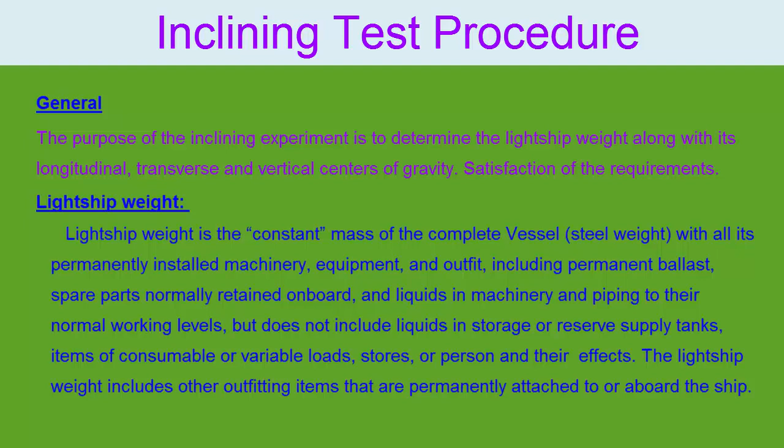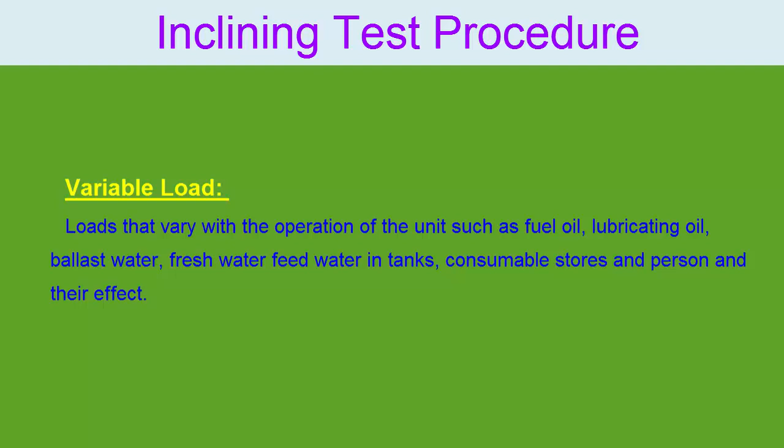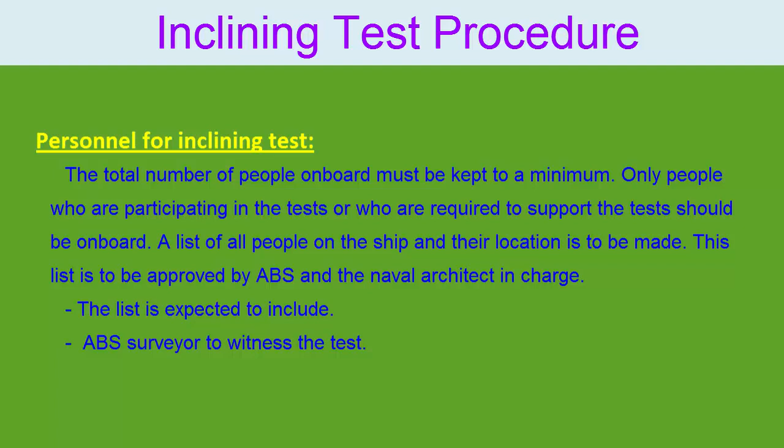Personnel for inclining test. The total number of people on board must be kept to a minimum. Only people who are participating in the tests or who are required to support the tests should be on board. A list of all people on the ship and their location is to be made. This list is to be approved by ABS and the naval architect in charge. The list is expected to include an ABS surveyor to witness the test, 2 naval architects to run the test, make measurements, monitor ballasting procedure and help conduct the deadweight survey.

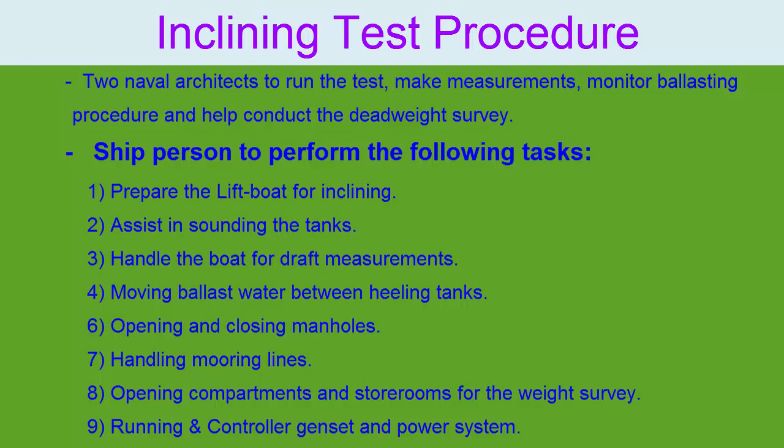Ship persons to perform the following tasks. 1. Prepare the lift boat for inclining. 2. Assist in sounding the tanks. 3. Handle the boat for draft measurements. 4. Moving ballast water between heeling tanks. 6. Opening and closing manholes. 7. Handling mooring lines. 8. Opening compartments and storerooms for the weight survey. 9. Running and controlling genset and power system. 3. People familiar with the lift boat and all its equipment to assist in the weight survey. These persons shall have the necessary keys to provide access to any locked compartments.

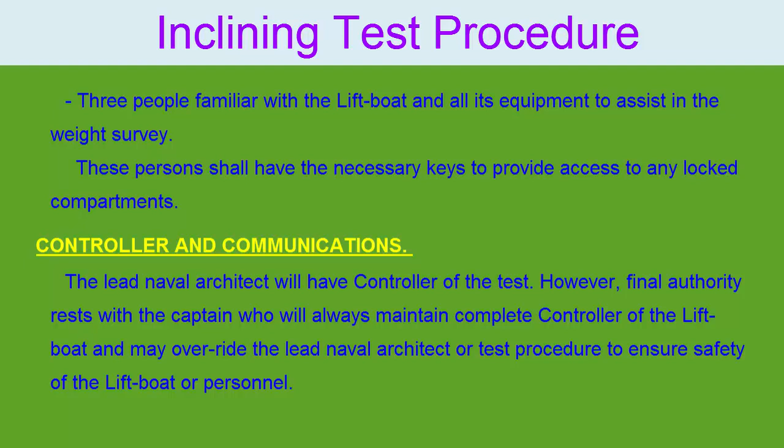Control and communications. The lead naval architect will have control of the test. However, final authority rests with the captain, who will always maintain complete control of the lift boat and may override the lead naval architect or test procedure to ensure safety of the lift boat or personnel.

Inclining control shall be set up in the pilot house conference room. The table will be provided to record data and make calculations. There shall be an efficient two-way communication system between the inclining control and the standby boat, the crane operators if necessary, each pendulum station, each draft reading boat.

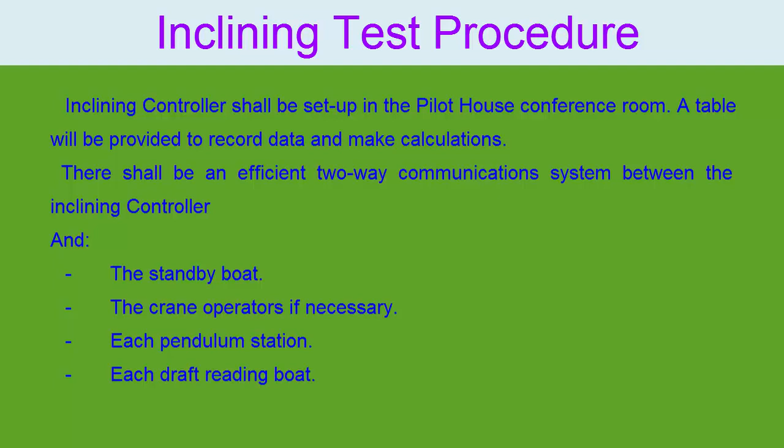Preparation for deadweight survey. Documentation and notifications. The ABS surveyors will be given notice of the date and location of the tests as early as possible. The following information will be submitted to ABS. Incline procedure. A list of items to go on/off board to achieve lightship condition from the inclining condition is to be prepared. Vessel identification. Date, time and location of test.

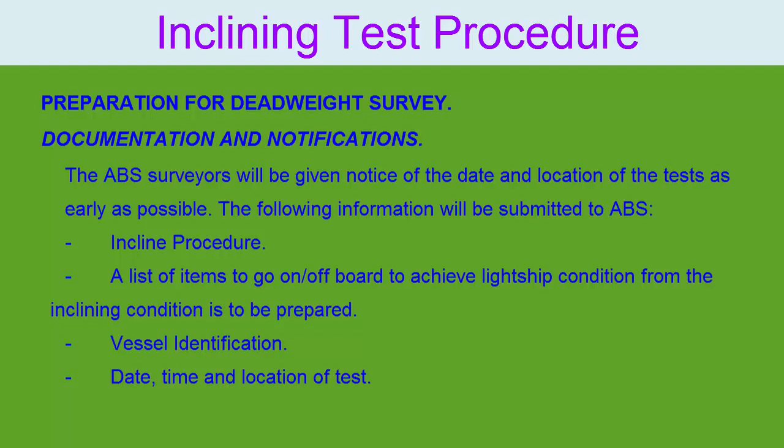Inclining weight data including type, number, certification, method of handling and expected heel angle. Estimate of the lift boat displacement and stability at the time of inclining. Condition of tanks, specifying those which will contain liquids but will not be pressed up. Draft and approximate KG. Trim/heel of lift boat.

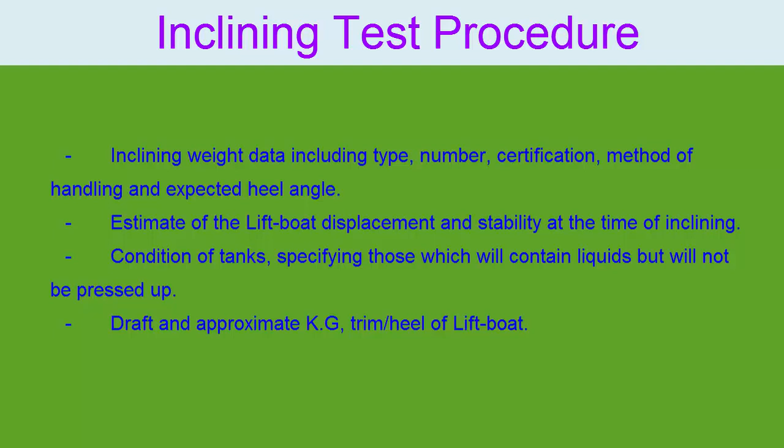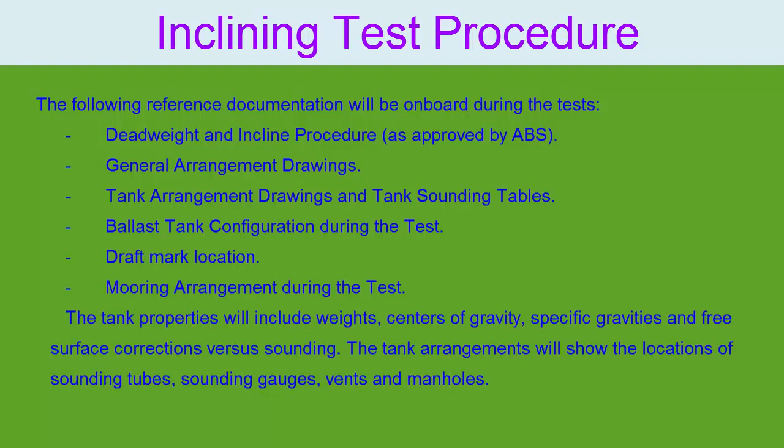The following reference documentation will be on board during the tests. Deadweight and incline procedure as approved by ABS. General arrangement drawings, tank arrangement drawings and tank sounding tables. Ballast tank configuration during the test. Draft mark location. Mooring arrangement during the test. The tank properties will include weights, centers of gravity, specific gravities and free surface corrections versus sounding. The tank arrangements will show the locations of sounding tubes, sounding gauges, vents and manholes.

Achieved test condition. Test of sounding system. All the sounding systems should be tested before the inclining experiment. All Z-drive units are to be locked to avoid movement during inclining. Cleanup. Proper cleanup is essential. The weight estimate of each item is subject to some error which can accumulate to a significant value. Often, people estimate high, so this introduces a weight penalty on a lift boat. Proper cleanup is essential to minimize this penalty.

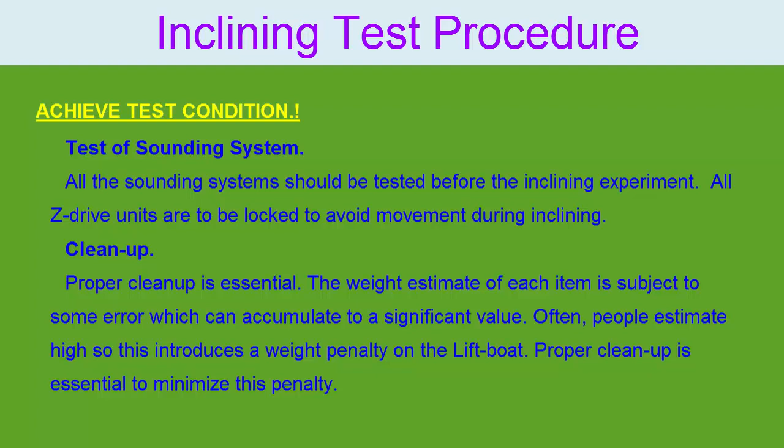The manholes of all hull void tanks shall be opened and their residual contents shall be stripped out by portable pumps. Interior manhole covers for tanks to be void or slack shall be left off until completion of the inclining. The tanks will be inspected by the ABS surveyor and by the naval architect in charge. As much deck load as possible must be offloaded before the start of the test. This includes portable equipment, etc. All shipyard material should be removed from the lift boat. This includes all welding equipment, scaffolding, temporary stores or scrap metal.

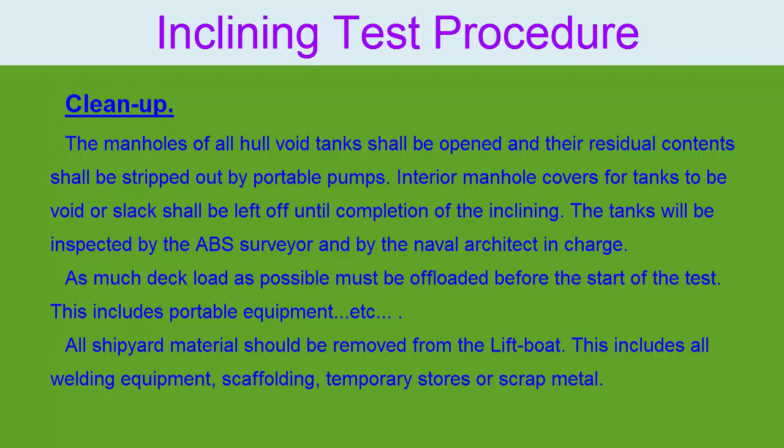Lift boat personnel should prepare a detailed list of remaining weights with VCG, LCG and TCG to be deducted, added or relocated from the as-inclined unit to arrive at the light ship condition. The number and weight of items to be added, removed or relocated shall be kept to a minimum.

The naval architect will be aboard the vessel at least 2 days prior to the inclining. A list of all weights on board will be compiled and updated at the last minute before starting the test. This list will be subject to review and acceptance by the attending ABS surveyor.

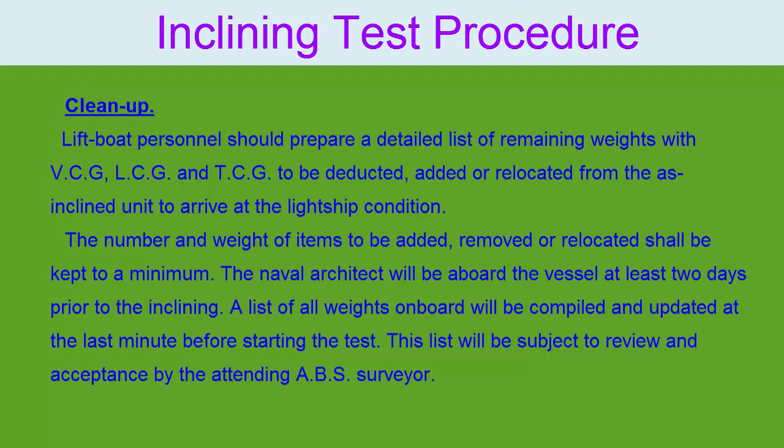All items which may swing or move shall be secured. All movable systems should be in their stored position. Crane booms shall be in their rests. All equipment, fresh water makers, shall have liquids at normal operation levels.

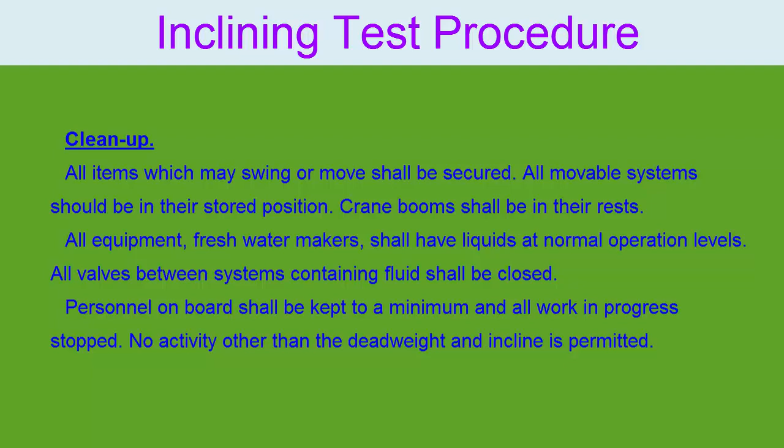All valves between systems containing fluid shall be closed. Personnel on board shall be kept to a minimum and all work in progress stopped. No activity other than the deadweight and incline is permitted.

Tank preparation: interior manholes to all voids and to all tanks to be slack or empty shall be opened for inspection by the witnessing surveyor and shall be left open until the test is complete. The spaces must be gas-freed and safe for entry.

Liquid levels in tanks, for which there is no choice but to leave them slack, will be adjusted so that the free surface is relatively steady during the test. Fill levels corresponding to abrupt changes in tank dimensions shall be avoided. Communications between tanks should never be permitted and any cross connections should be closed.

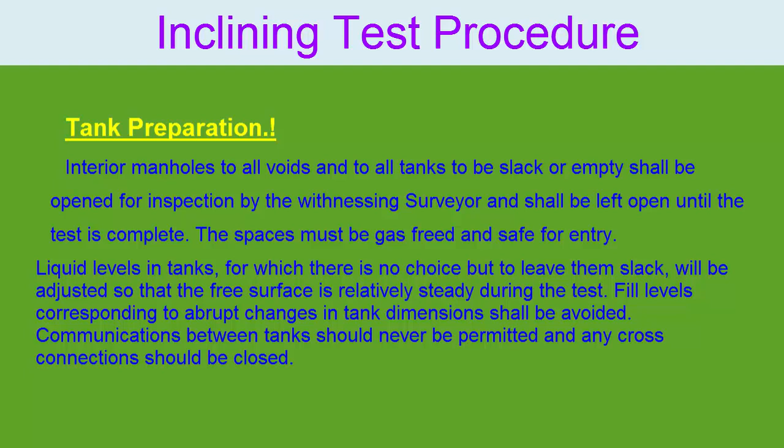Pressed-up tanks are assumed to be completely full with no pockets or voids, i.e. 100% full. The 98% full condition normally accepted as full for operational purposes is not acceptable for an incline.

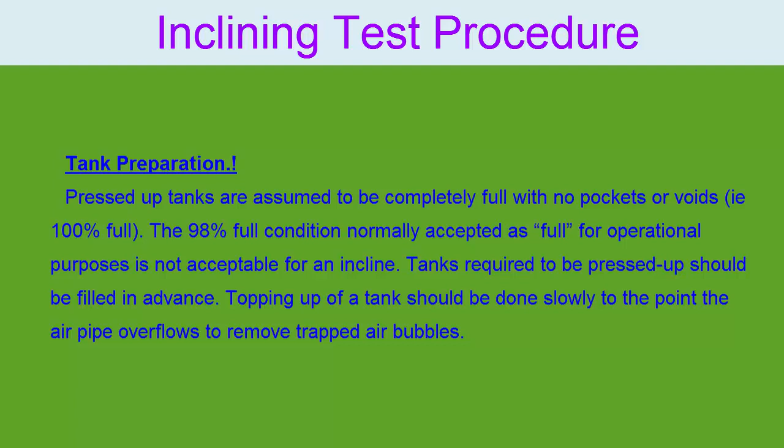Tanks required to be pressed up should be filled in advance. Topping up of a tank should be done slowly to the point the air pipe overflows to remove trapped air bubbles. The fuel oil day tank will be topped off just prior to draft reading and tank sounding.

Thereafter, the generators must be supplied from the day tank until completion of the test. Day tanks shall be sounded at the beginning and end of the incline experiment. Tank cross connections should be closed, if any.

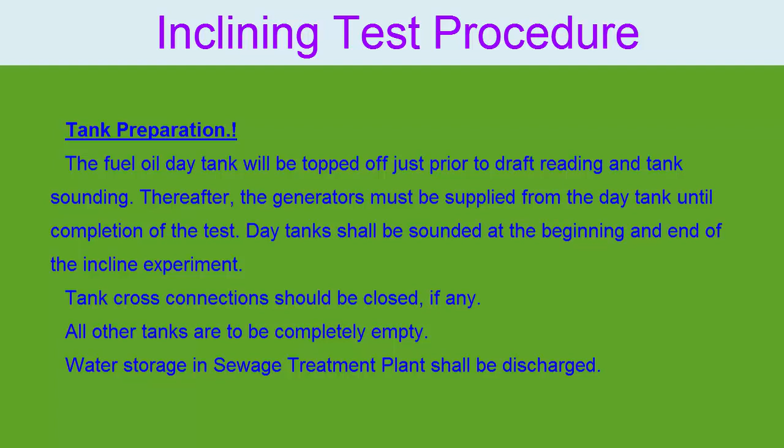All other tanks are to be completely empty. Water storage in sewage treatment plant shall be discharged.

Moorings: the lift boat will be held in place by mooring lines. The lines will be slackened when necessary during the test.

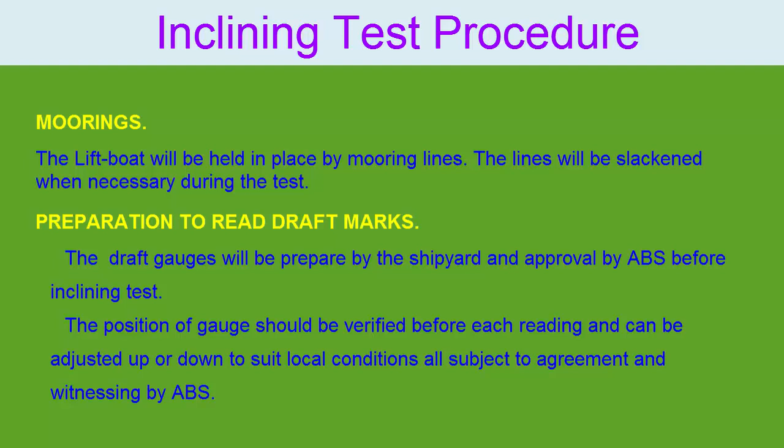Preparation to read draft marks. The draft gauges will be prepared by the shipyard and approval by ABS before inclining test. The position of gauge should be verified before each reading and can be adjusted up or down to suit local conditions, all subject to agreement and witnessing by ABS. Draft reading can also be carried out visually subject to site surveyor's acceptance.

The specific gravity of the seawater surrounding the unit at the time of the test should be determined. Sufficient samples of the water are to be taken to ensure complete coverage. Samples should be taken mid-draft, port and starboard, on the surface and at a depth of 3.5 meters.

The temperature of the water should also be recorded to apply the appropriate temperature corrections. The results from all the readings will be averaged to yield the final test specific gravity.

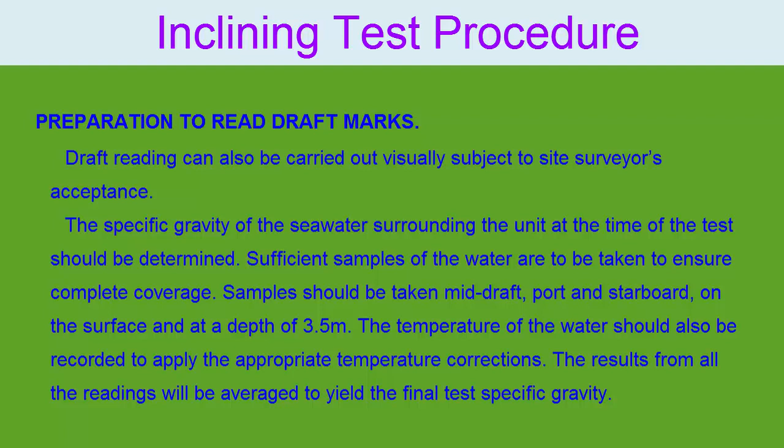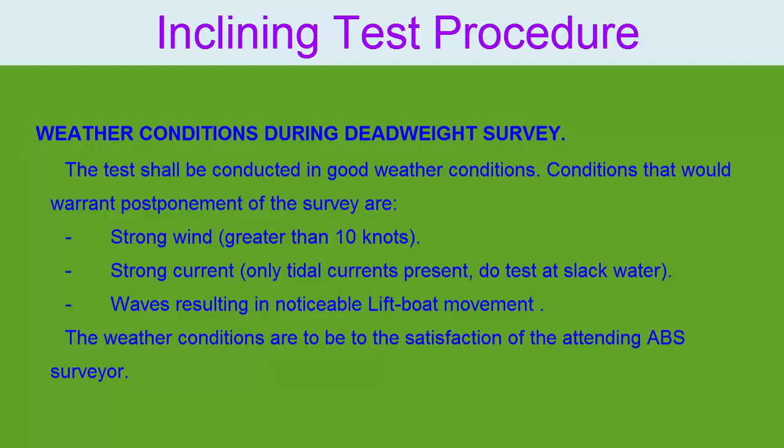Weather conditions during deadweight survey: the test shall be conducted in good weather conditions. Conditions that would warrant postponement of the survey are: strong wind greater than 10 knots, strong current, only tidal currents present, do test at slack water, waves resulting in noticeable lift boat movement. The weather conditions are to be to the satisfaction of the attending ABS surveyor.

Tank space and deck survey.

The incline team will board the lift boat sufficiently in advance of the test in order to do a full accounting of all the loose weights on board, ensure the tank conditions are as per the ballast plan, and ensure the equipment to complete the incline is present.

The yard engineer will start the process of weighing all loose items well in advance of the incline. They will place numbered tags on all items weighed along with the measured weight of the item.

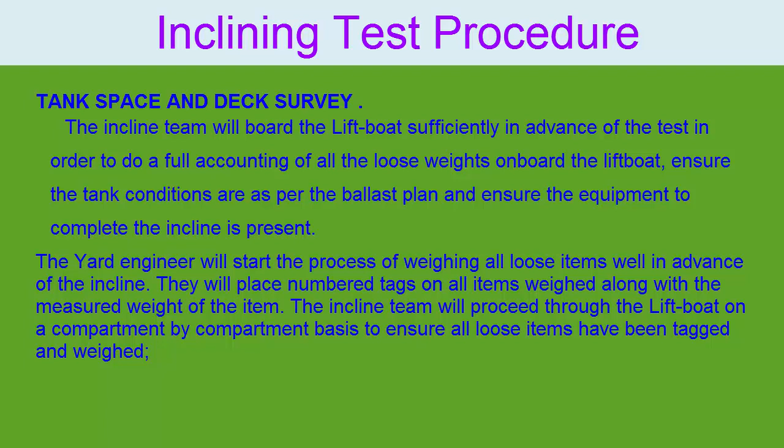The incline team will proceed through the lift boat on a compartment-by-compartment basis to ensure all loose items have been tagged and weighed, that the values make sense, that the center of gravity is estimated, and that a proper description is entered on the forms.

Upon completion of a space, they will close it off and access will be restricted until completion of the test. In this way, a list of extra items which must be deducted from the lightship weight will be developed.

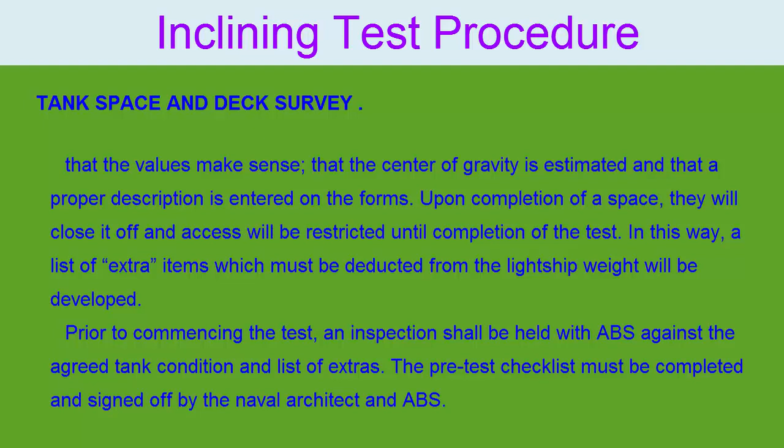Prior to commencing the test, an inspection shall be held with ABS against the agreed tank condition and list of extras. The pre-test checklist must be completed and signed off by the naval architect and ABS.

Reading of draft marks and water density.

When all parties are satisfied the condition of the lift boat is known and the pre-test checklist has been signed off, preparations will be made to take the draft readings.

The towboat should be confirmed to be on station, connected to the towing bridle and standing by.

The naval architect in charge will make a record of the time the deadweight survey started and record local weather conditions: wind, current, wave, air temperature, and cloud cover at the start time.

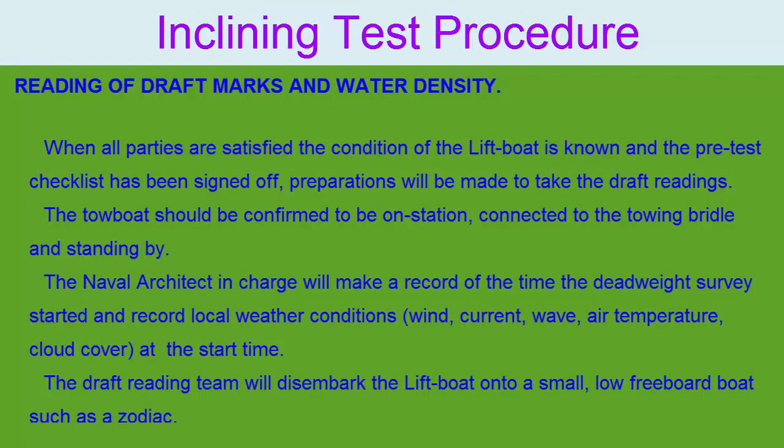The draft reading team will disembark the lift boat onto a small, low freeboard boat such as a Zodiac. They should have a spare draft gauge, hydrometer plus spare, thermometer plus spare, one water sample bucket to get water sample and one test bucket in boat, high-power flashlight, radio, pen and paper to record draft reading.

They should proceed to take readings of the specific gravity at the four corners of the lift boat. Other location measure points are mentioned.

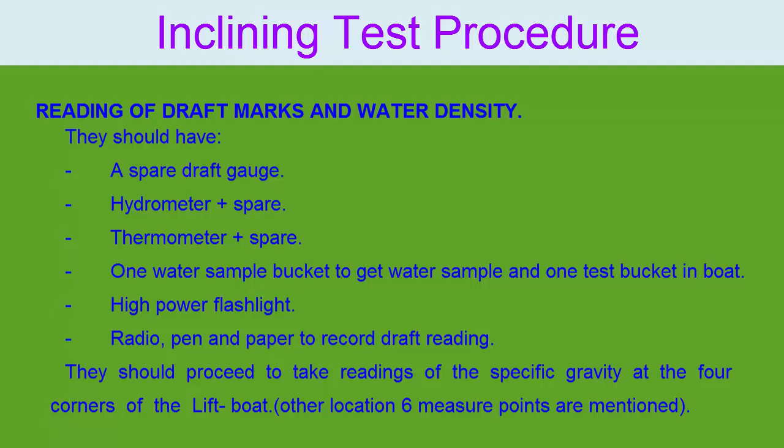When these have been completed and relayed to controller, notification will be given to the towboat and the order will be given to the mooring teams to slacken the mooring lines.

The moorings must be confirmed to have been slackened off. The draft reading persons should verify the mooring lines are all hanging vertically without tension and relay this to controller.

The draft reading person will then proceed to the pre-installed draft gauges. They will take 5 readings, recording each reading locally and relaying each reading to controller. They should make a record of the time the reading was taken.

Upon completion of taking the readings, the draft reading person will return to the lift boat. Controller will make a record of the time the deadweight survey was completed and record the local weather conditions on completion of the deadweight survey.

Notification will be given to the towboat that the deadweight survey is finished. They will stand by pending the decision on whether or not the inclining experiment will proceed. If the inclining experiment is not going to occur, then the standby moorings will be pulled in again and the towboat released.

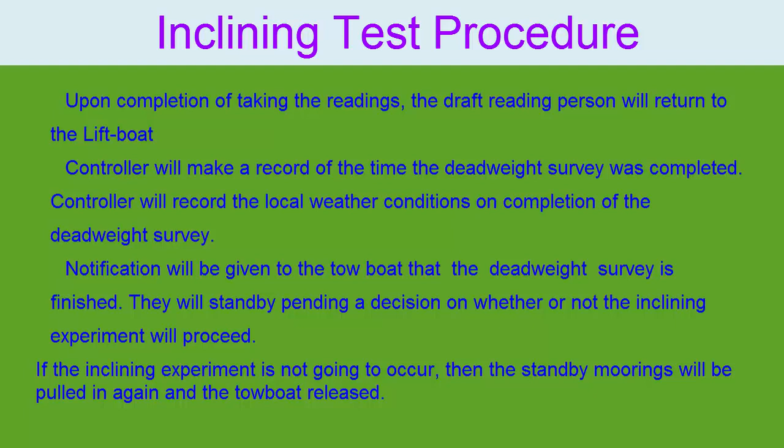Conduct inclining experiment. Weight and location survey.

It is assumed that the deadweight survey has just been held with the lift boat pre-ballasted to the experiment draft and that the light ship weight and tank conditions are verified. The heeling tank locations and weights should have been previously surveyed and agreed with ABS.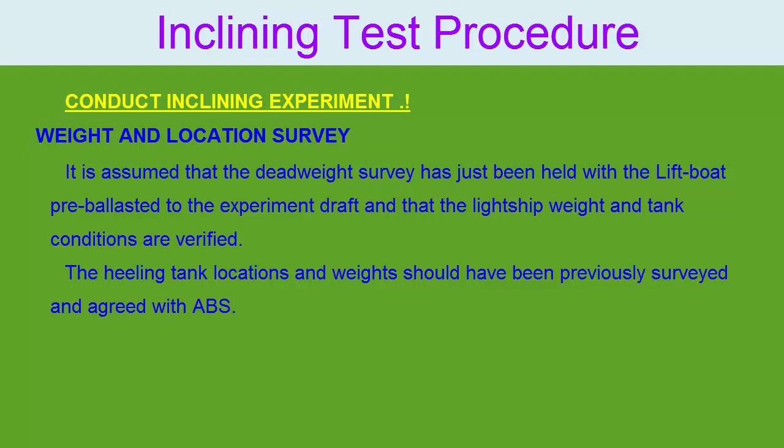Reading of pendulum and draft marks. During the incline there should be teams: one to monitor each mooring line, two to monitor the towing bridle, three to monitor the ballast tanks and report readings, and four to monitor the pendulums and report readings.

The towing bridle team should be equipped with a radio and should stand by in a position where the towboat and tow bridle can be monitored. There should be sufficient illumination for them to monitor the towing bridle. They will be queried just before each reading to confirm the line remains slack and that there is no contact with the towboat or significant prop wash.

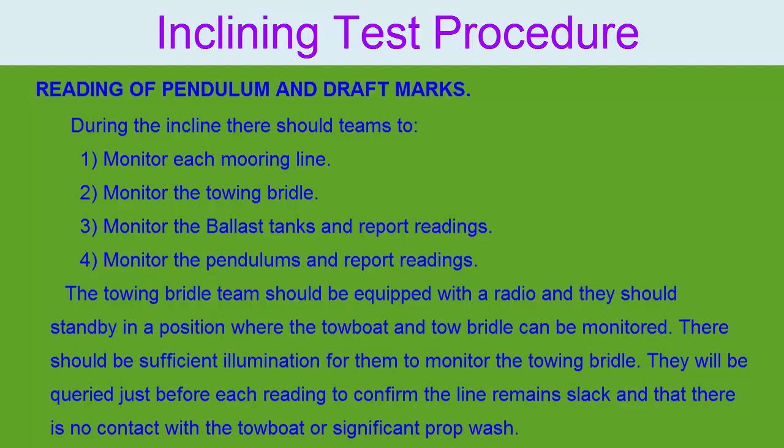The pendulum teams will be equipped with a radio and measurement recording form and should stand by each of the pendulums. After a ballast move has been completed and the lift boat stabilized, they will be asked by controller to start their reading. The pendulum is expected to fluctuate slightly, and they should be instructed to report the mean location and not one of the extremes.

This averaging process should be done over at least 10 full swings. This should be marked on the paper attached to the batten behind the pendulum wire along with the number of the ballast shift for identification purposes. This location should then be relayed to controller.

The ballast shifting team will consist of the ballast operator and deck person to perform take soundings/ullages and measure the specific gravity.

They shall be equipped with radios to advise when the levels in the tanks are acceptable.

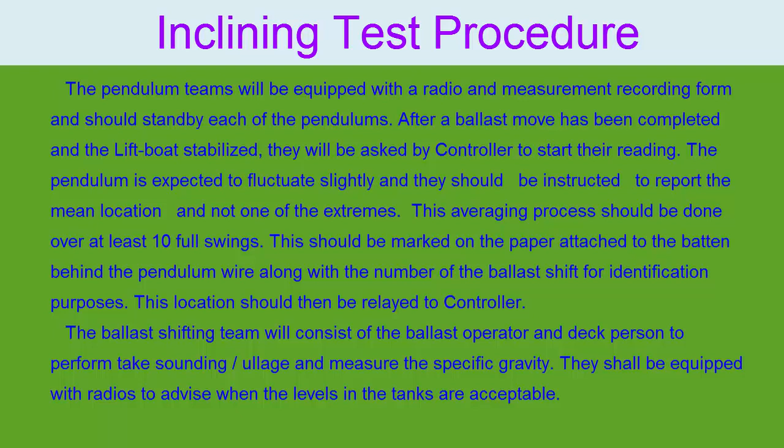Inclining procedure: the pre-incline checklist should be completed and signed off by the lead naval architect and ABS. A list of items to go on or off board to achieve lightship condition from the inclining condition is to be prepared and accepted by the surveyor.

The depth of water will be measured and recorded in as many locations as necessary to ensure the unit will not contact the bottom, and accepted by the surveyor. The list of the heeling tanks and the deck markings should have been verified and signed off by the lead naval architect and ABS. The location and setup of the pendulums and ballast tanks should have been verified and signed off by the lead naval architect and ABS.

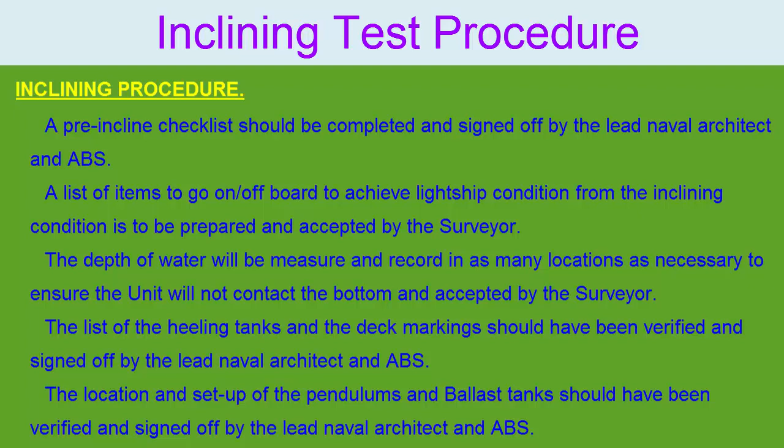The incline teams will be dispatched to their respective stations. The radio check will be done. The incline lead will call each team in turn to confirm the radios work, that they are in location, and that they are ready to proceed. Notification will be given to the towboat that the inclining experiment is about to proceed.

A record will be made of the current weather conditions: wind, current, waves, temperature and cloud cover, and the time the experiment started. The standby moorings will be slackened if need be after notification has been given to the towboat.

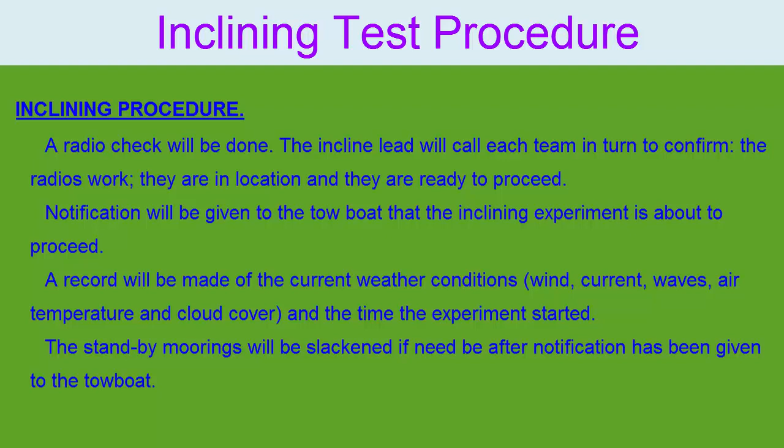For each ballast shift, the following sequence of events should be followed. First, the controller will announce that ballast shift X is about to occur, not required for the initial step which is preset. Second, the ballast person should transfer the correct amount of ballast between the heeling tanks. The tanks should be sounded, and ABS should confirm their agreement that the correct amount of ballast has been transferred.

Third, the controller will query each mooring team in turn to make sure the lines remain slack. Fourth, the controller will query the tow line team to make sure the tow line is slack and there is no contact with the towboat or washback from the towboat propellers.

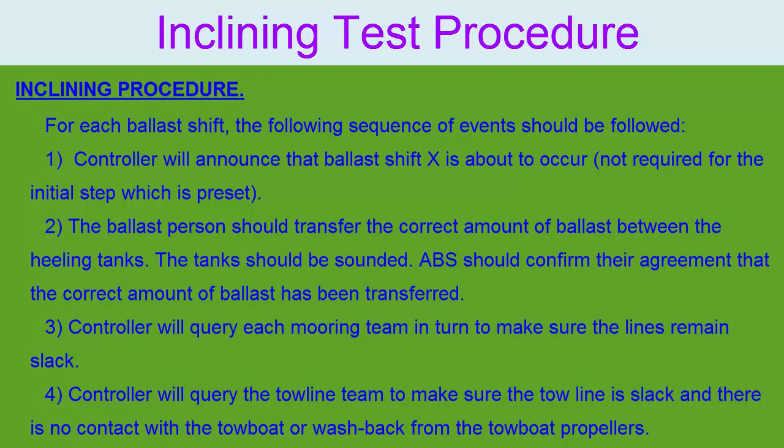Fifth, if necessary, the test will pause for the lift boat to stabilize. The wind speed and direction will be read off the anemometers and recorded. Sixth, the controller will advise the ballast tank team to start their reading tank sounding. Seventh, the controller will advise the pendulum teams to start their readings.

Eighth, the controller will query the ballast tank team for its reading tank sounding. Ninth, the controller will query the pendulum teams for their readings. The controller will keep the record of the steps and record the time at which each step is completed.

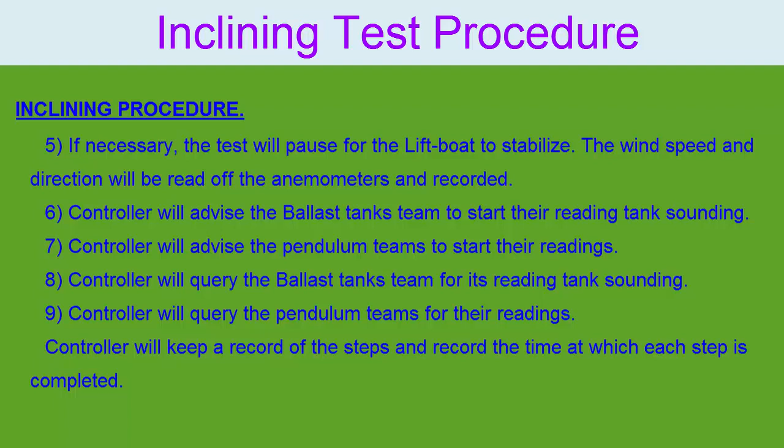The anticipated time to conduct the inclining must be estimated. If too long, water may be unacceptable as inclining weight, due to possibility of wind shifts over long periods of time. Blanks must be inserted in transfer manifolds to prevent the possibility of liquids being lost during transfer.

At the end of the test, the controller will record the end time of the test and the local weather conditions in effect at the end of the test.

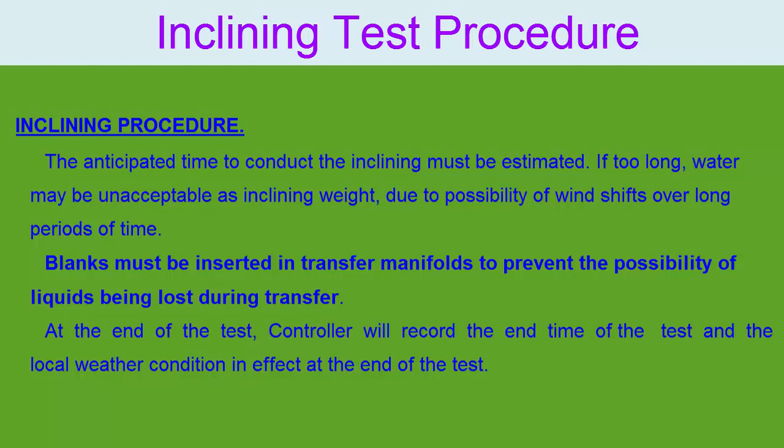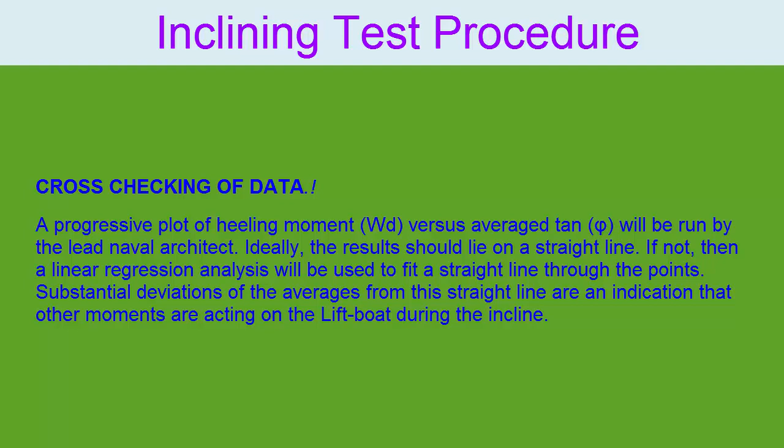Analysis of data: the results will be plotted from the pendulums as they are reported to the controller during the test. Additional corrections will be done after the test to consider modifications of the waterplane area during the inclinations. The need for additional data points or checking of existing data will be decided by how well the data plots.

The diagram will be calculated using the least squares method. Copies of the data will be given to the ABS surveyor and the owner's representative. The naval architect will retain the originals, perform the calculations, and prepare the report.